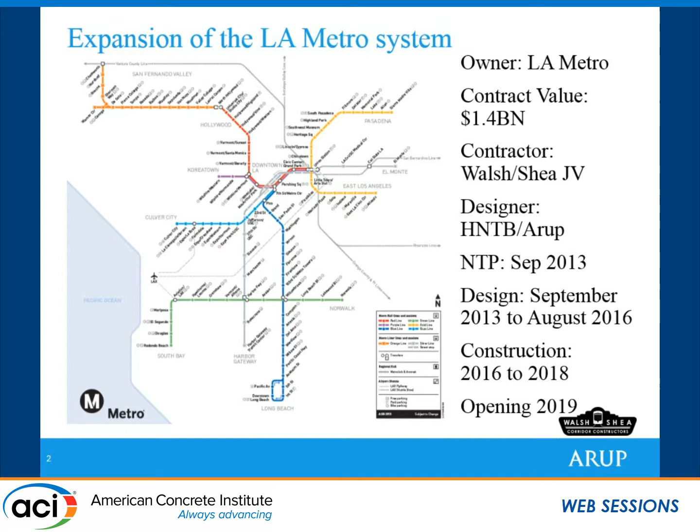The contract value is about $1.4 billion, and the contractor is a joint venture of Walsh-Shea. We are the designer with HNTB. The NTP was in September of 2013. We went pretty much straight into design, and construction is ongoing, looking to open in 2019.

Flipping it on its side a little bit for more of an explanation of the project. The first part over here on the right-hand side is fully underground. It consists of 3 stations and about 1.6 miles of tunnels. And then it goes into a series of cut and cover structures, elevated and at-grade structures, and then back into a cut and cover section near the LAX airport before it comes up on the Green Line back over here and connects up to make a nice loop system.

Everybody will finally be able to get almost to the airport using the metro, until the people mover that's scheduled to go into construction will link it all together.

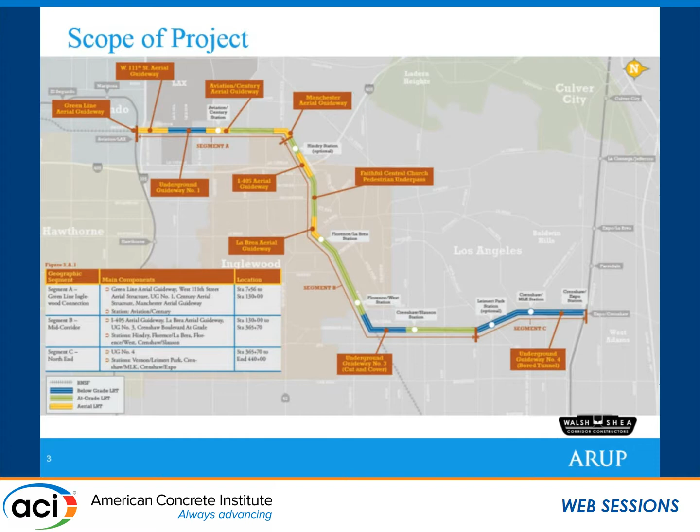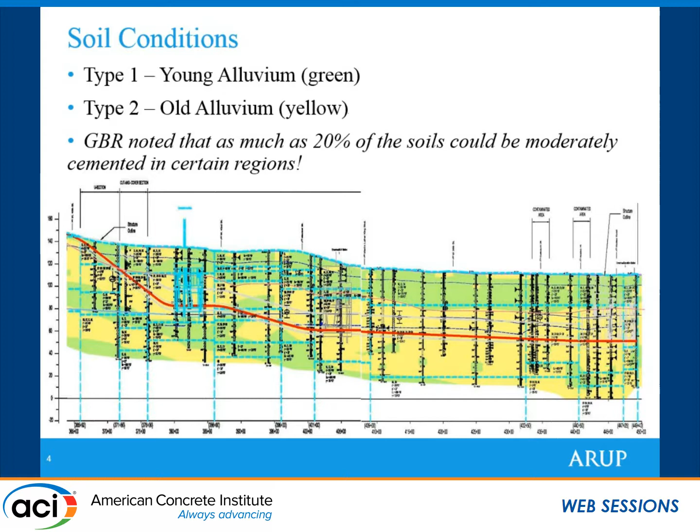Soil conditions on the site are mainly alluvial soils of varying age, between young alluvial materials and older, partially cemented alluvial materials. One of the reasons I mention that is because in the geotechnical baseline report, there were varying levels of cementation of the soils present. In some locations, up to 20% of the soils were cemented. In hindsight, that probably should have tipped us off to something that was going on here to pay closer attention to.

When doing cementitious or non-cementitious grouting, you should always pay attention first and foremost to what the sieve analysis showed. Usually what you're looking for is to figure out at what percentage the fines fall below the 10% level, because that's going to tell you what techniques you need to use in order to treat the ground so you can actually do civil work construction.

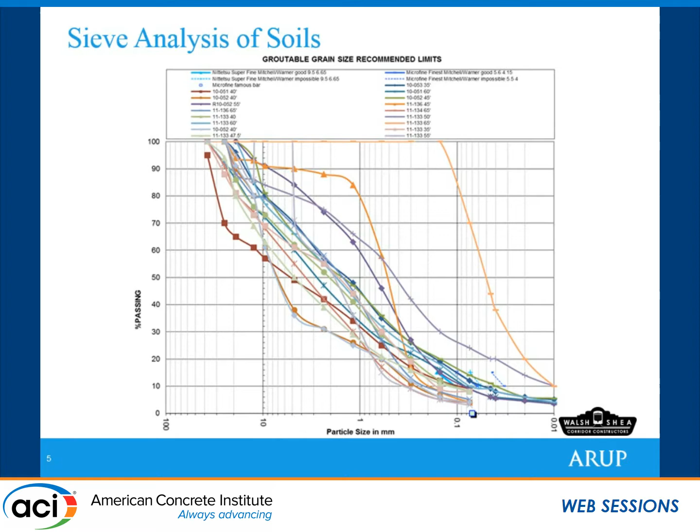In general, there are 3 major types of cementitious grouting, and then chemical grout. If your fines are just under a millimeter, you're looking at using a normal grout to treat the ground. Below that, you have fine cement grouts, which could be your microfines or your ultrafines. And then beyond that, you're looking at sodium silicate mixtures under a pressure grouting situation.

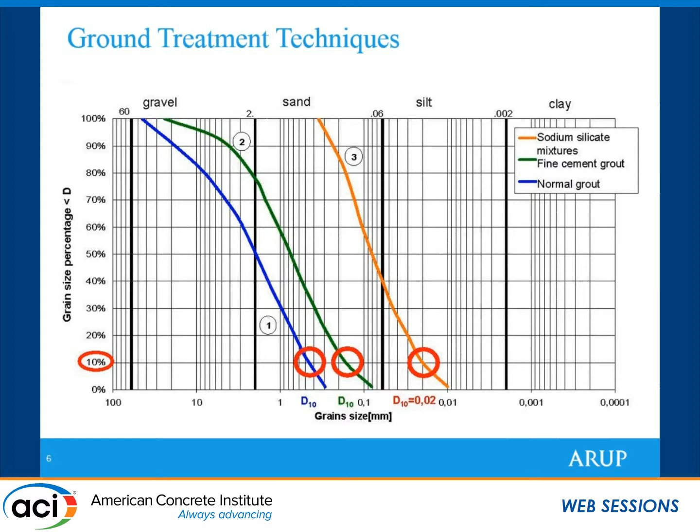The first and the largest station in the works is the Expo station. It's a total length of about 1,000 feet and is the terminal station for Crenshaw. One of the things that was noticed is that there were 2 different aquifers, and in order to build the station to begin with, one of the worries was that you were going to get basal heave due to this water pressure as you start to excavate down.

And the selected construction method here was to use bottom-up slurry walls, and then grouting the open windows between those panels due to the number of large sewers and other utilities that were in the way, and we couldn't obviously create a continuous panel wall all the way around it. So what we did was we were looking at using jet grout between those open windows to close those up and be able to excavate down.

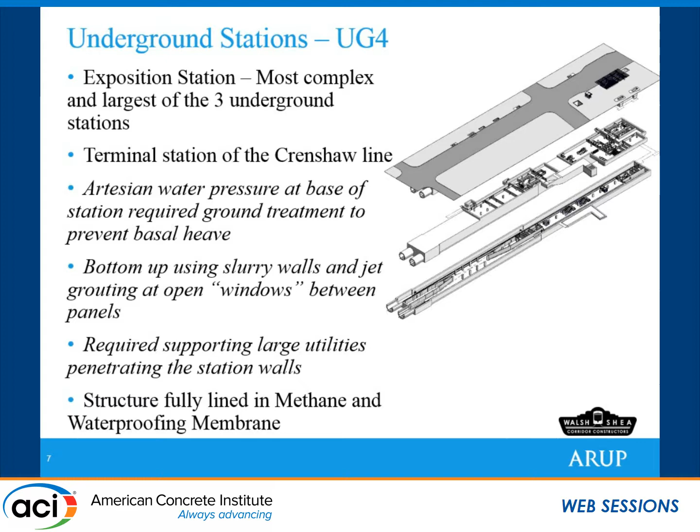It initially required that we do jet grouting across a large majority of the base of this thing, and had about 30,000 cubic yards of jet grouting. And when you're looking at about $500 a cubic yard in place in jet grouting, that's a lot of money.

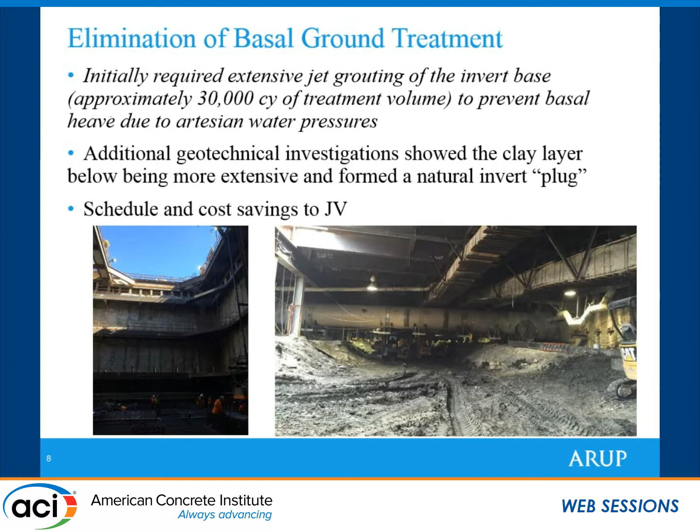So instead of going ahead and looking at that, what we did was we decided to actually invest in making the slurry walls deeper, going ahead and embedding them into a clay layer that was deeper, and then using relief wells to essentially eliminate the ground treatment. So in certain cases, just getting a little bit smarter about how you're going to schedule out your construction ended up saving us quite a lot of schedule and money.

The principle of jet grouting, for those that aren't familiar, is that you're using a large lance and a mixture of fluids to go ahead and treat your ground. Most commonly, we use a 3-portion mix of air to kind of pre-cut the ground, associated with water, and then you're injecting your cement slurry mixture. And you're usually going ahead and putting in primary columns, and then you're coming back and doing secondary or tertiary columns to go ahead and close everything up and make them all watertight, or at least as watertight as you can get it as you

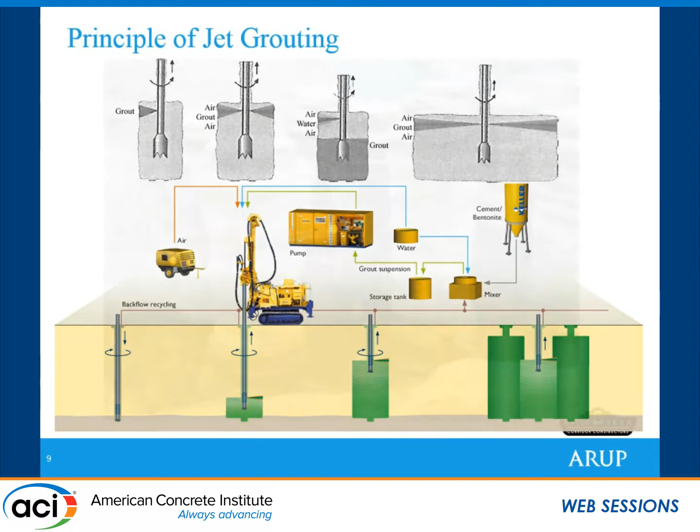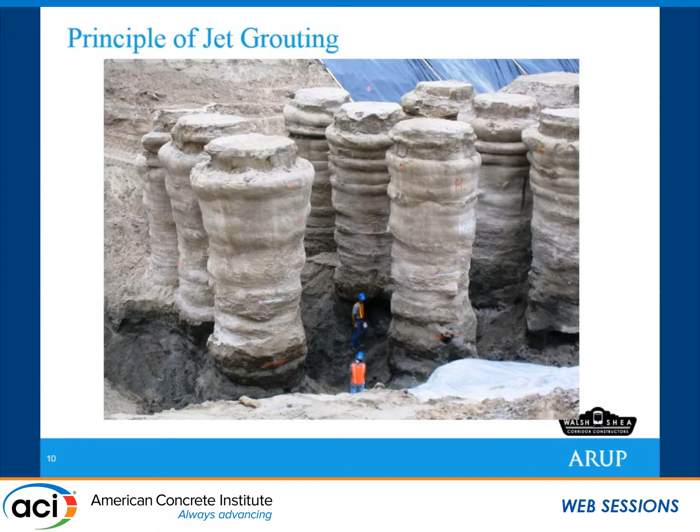go down. This is some of the results of what you can get in favorable conditions with jet grouting. Very large, essentially like stone columns in place. And some of the things that happened early on in the project as we got our test results back, when you're doing jet grouting, you're taking wet samples, which is basically you're injecting material into the ground. And so spoils are rising up to the surface, and you're basically sampling them, and you're going ahead and using your standard concrete sampling on that.

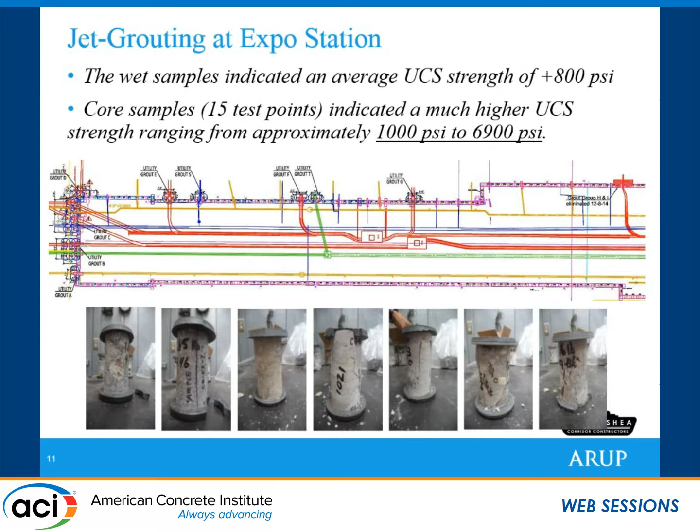We started getting back strengths that were pretty high from our wet samples, and then you do coring as well, in situ coring, and we got some that were as high as 6,900 psi. Now, that's really high for jet grout, and while this was great for some of our stuff, it also can be difficult in other things, especially when you have to excavate through it.

So one of the things that we have to do is launch a tunnel boring machine out, and usually we do ground treatment in front of the station walls, so that as we break out into the ground, we don't have inrushes of soil and material. Well, you can imagine that mining through 6,900 psi ground is going to create a lot of wear right out the gate on your tool that you're using to excavate out this long subway system. So we had to have a different solution adopted based on what our site conditions were giving us.

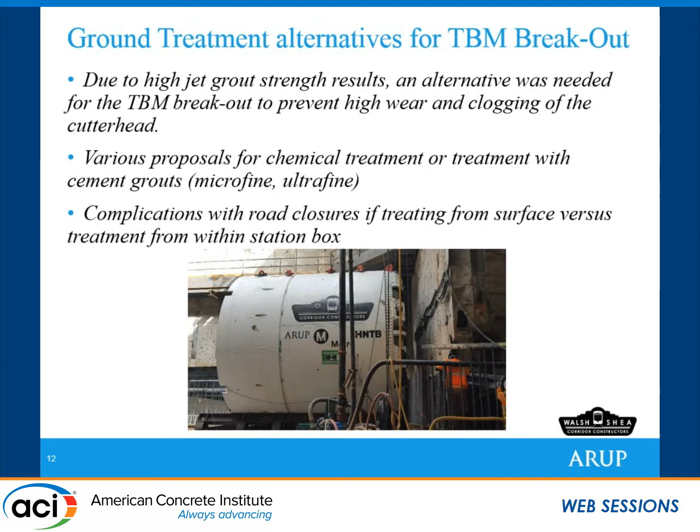And we looked at it, and our preferred treatment was going to move away from using a cementitious grout and instead use a chemical grout, where chemical grouts usually don't give nearly the strength, but would give you enough strength to actually do what you're looking at getting accomplished. So we looked at microfines, ultrafines, and then we eventually went with a straight sodium silicate solution. One of the complications was that we had a roadway in front of our station box, and at Rodeo Road and Crenshaw, it's a fairly busy road, and shutting down that street to do ground surface treatment was not the preferred option. So we looked at a couple different things there.

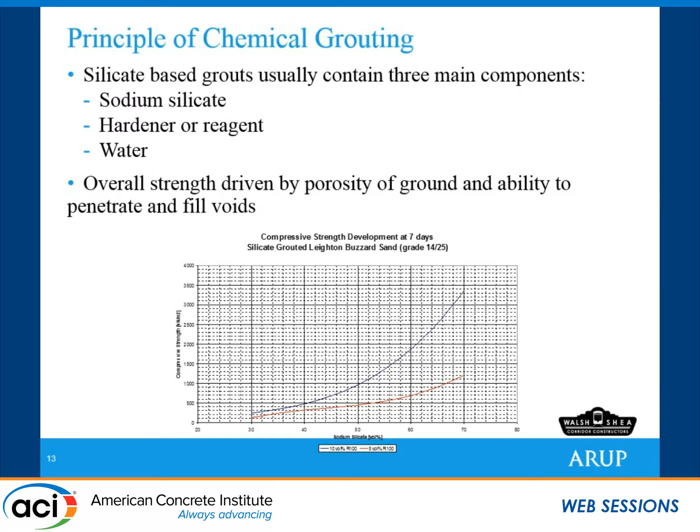Just a principle of chemical grouting. Our silicate-based grouts are sodium silicate with a reagent and then water. So really it flows like water and has that same viscosity. And again, the strength that you get is directly related to how much you can put into the ground and how porous the ground is. So if you have a lot of fines and you can't pump it in, you're not going to get nearly as much strength as if you were, say, grouting a clean sand.

So unlike jet grouting, where you're basically pushing a lance into the ground and then slowly withdrawing it as you're injecting, in chemical grouting, you actually pre-drill, install what we call a sleeved port pipe, and then you come back in with a double packer and you inject into the ground so that you can actually do it in stages in particular locations.

So in this case, this was Central Subway, where we did a series of groutings underneath buildings and underneath BART. This is a little cartoon of the lenses that get formed, but it's very much this way in the ground as you're injecting it. And the idea, again, is to use a primary, secondary, tertiary approach in order to get the coverage that you need. And then also the sleeved ports allow you to come back and do re-injections if you need to get the coverage you want.

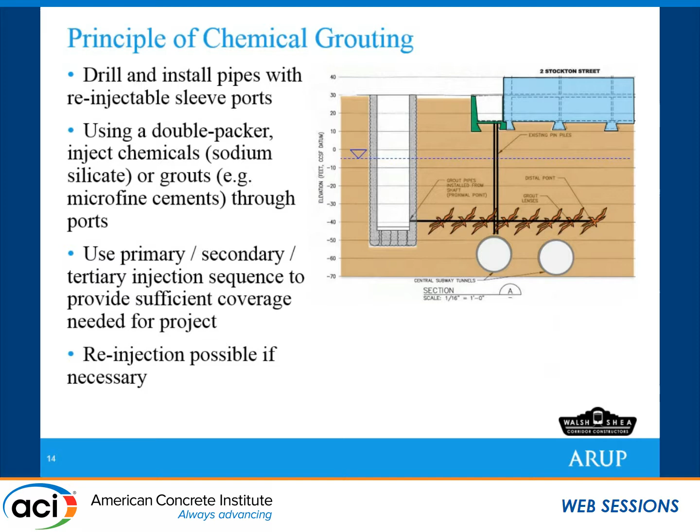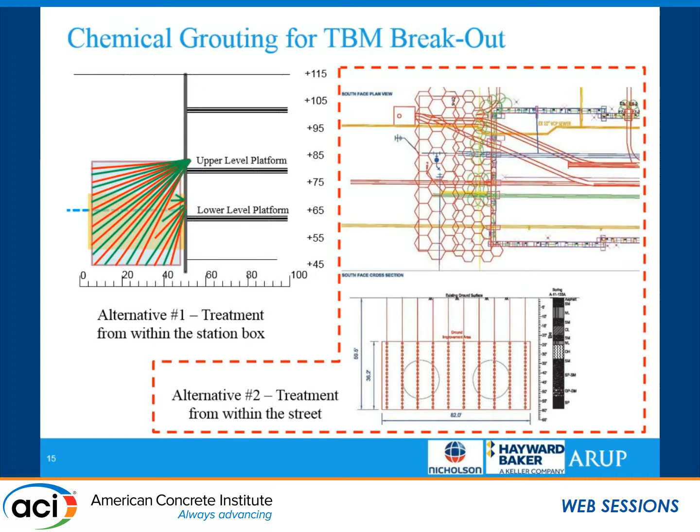The machine itself and some of the other concrete works that we were involved with, we designed out the precast concrete segmental tunnel lining, which is a traditionally reinforced segmental lining. We also designed out the cross-passage temporary and permanent works, track bed and the walkway inside. The tunnel station seismic joints were quite interesting because of the different behaviors between the station and the tunnel in a seismic event. And then we had to do all that ground treatment at the tunnel station interfaces and the cross passages.

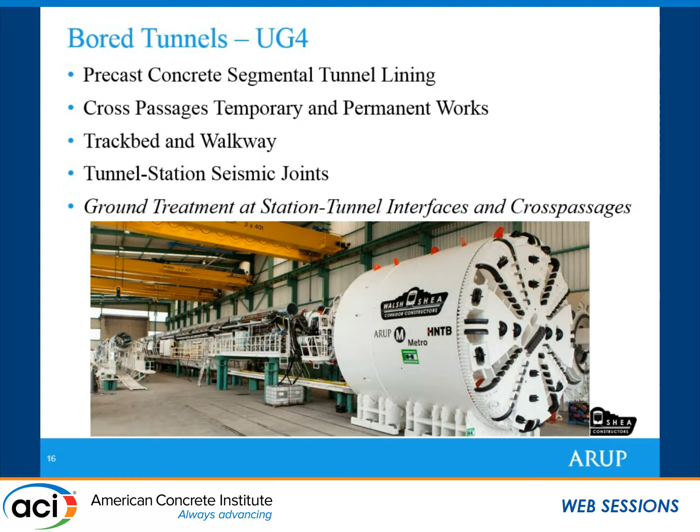So cross passages are oftentimes used for evacuation in between tunnels, but oftentimes become equipment rooms for the operations and maintenance people. We combine the two uses into one, but because these are short sections, these are usually hand mined. So you have to do ground treatment in order to make sure that the ground doesn't come in on you and move. This is an active roadway above where we were working, so any cave-ins here would obviously directly start affecting the roadway.

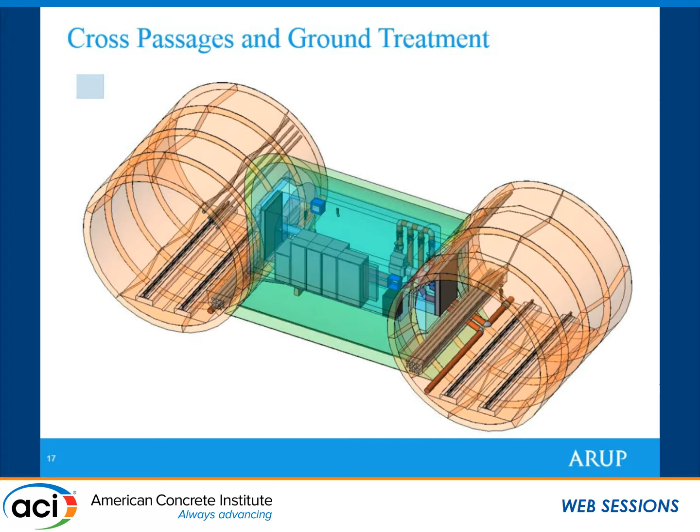What happened in the course of the project was we mobilized our contractor to do jet grouting at Expo Station. And as we were getting the test results back at Expo Station, we were getting those extremely high break strengths. And we started getting worried, well, we're going to have to mine through 6,000 PSI concrete. And we looked at trying to switch and go to chemical grouting. But unfortunately, at the locations where we had the cross passages, we had too many fines. And so the possibility that we would mine into an untreated section of ground outweighed the benefits of trying to do something different.

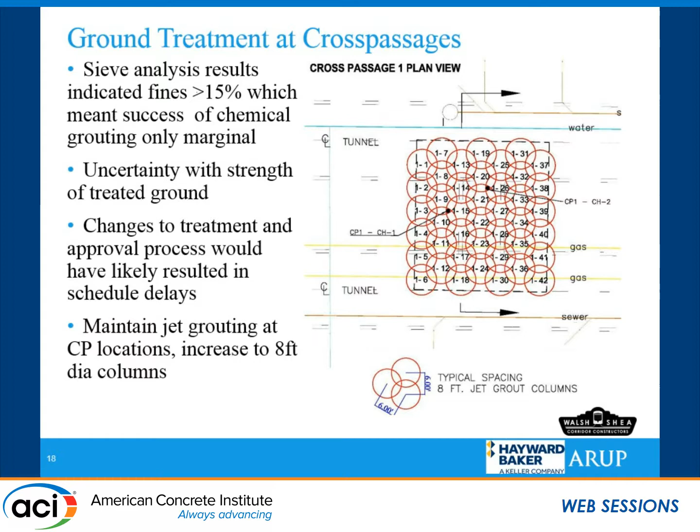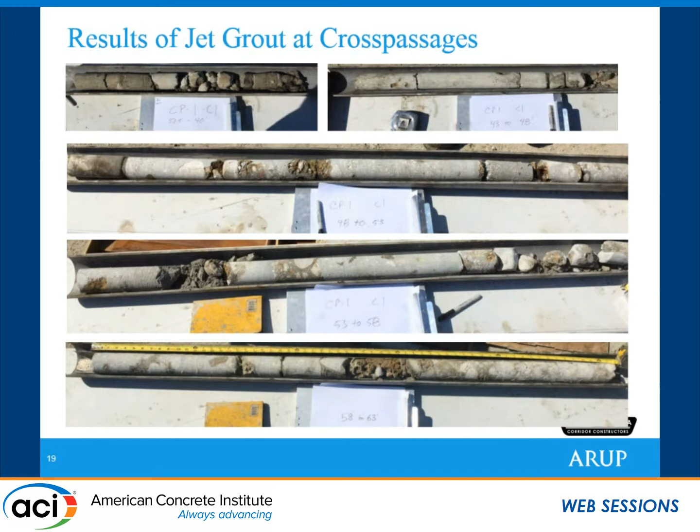So we ended up having to essentially, for schedule reasons as well as for risk reasons, stick with the jet grouting, which we tried to improve by going to 8-foot columns and using a wider spacing in order to maybe get away from those high break strengths that we were getting. Unfortunately, the test cores came back like baseball bats. I mean, they were just like fully big pieces of concrete. And we had very strong cement-like results, even higher break strengths. One of the things that you can do as well is you can always do a back analysis of your statistical results to get your design strength.

It came back as higher than 2,000 PSI for design. So we were essentially going to be mining through a big block of concrete. And that ended up being used as a benefit at the same time by eliminating a lot of the internal support that we would have had to have in the mainline tunnels and a lot of the cross-passage internal support.

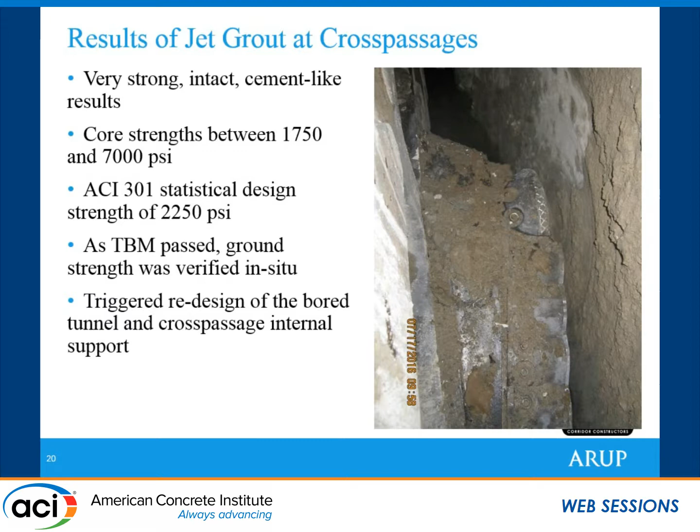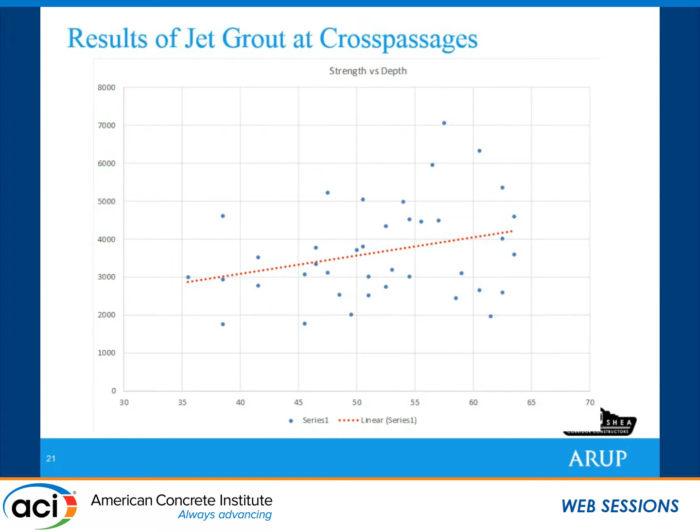So this is some of the results of strength versus depth here. Break strengths on the vertical axis versus depth on the horizontal axis. You can see some of these as high as 7,000 and on the low end right around 1,700. So pretty tough stuff. And just to show you a little bit.

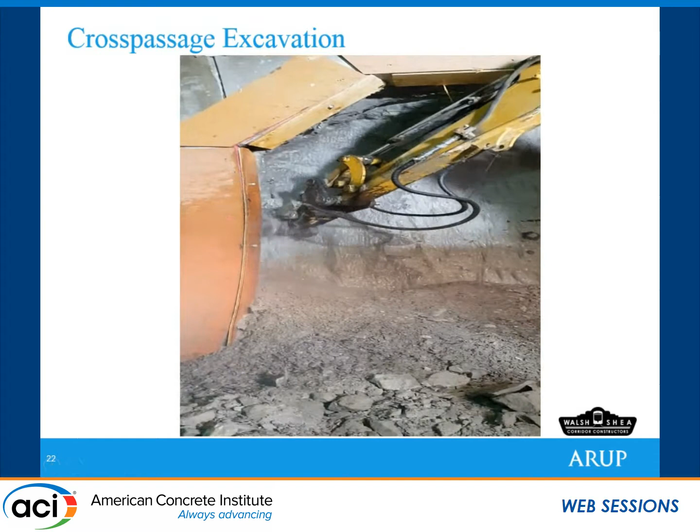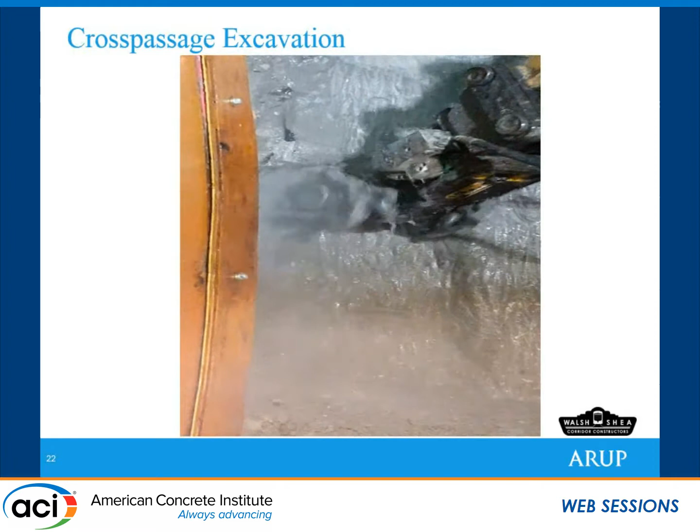So this is a road header trying to excavate through our treated soil. And as you can see, the stuff is just very, very tough, difficult to mine through. Took a long time, and this is one of the lessons learned about this whole job. Overall, we ended up making it work, but in hindsight, when you're working in the LA area, unless you want something like this to happen on your job, just keep this in mind.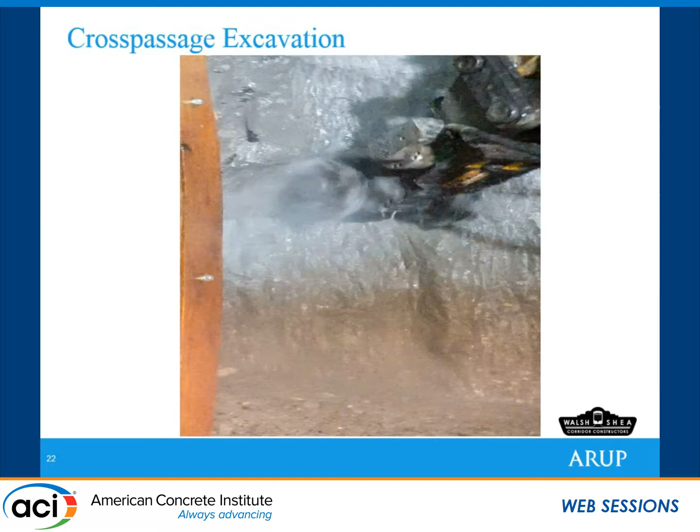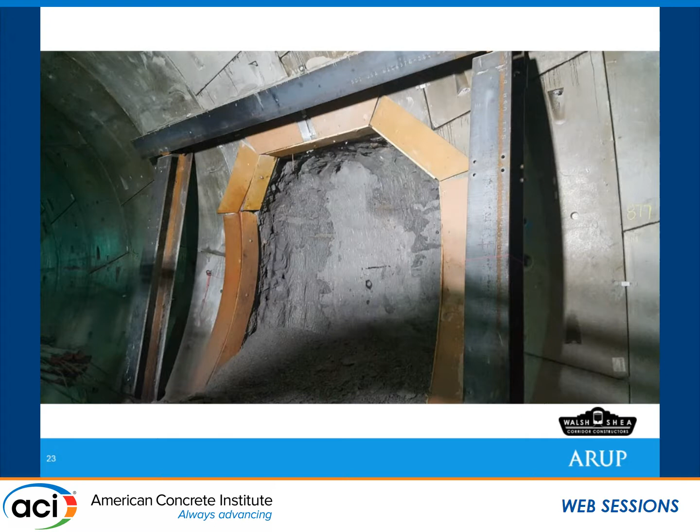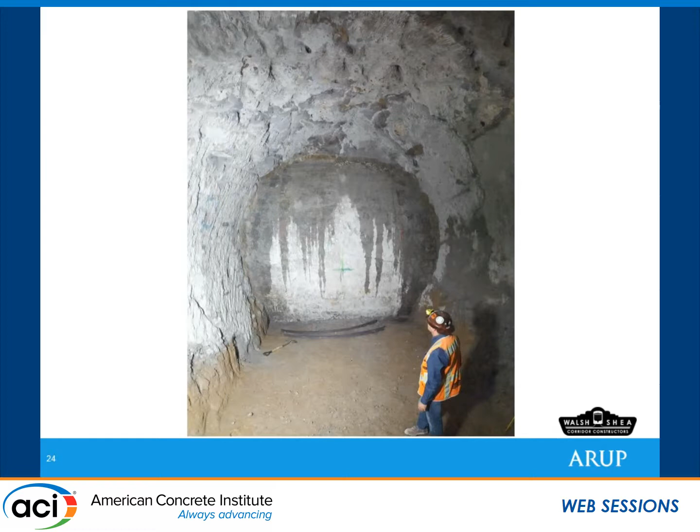Some pictures of the cross-passages as they were being mined out. It made it very stable. There was no groundwater at all. From a standpoint of sleeping at night, you knew it wasn't going to come down on your head. And in the end, we ended up eliminating all the shotcrete on the inside. We only had a picture frame around the outside of the tunnels. And we just put up a little bit of shotcrete to make a nice smoothing layer to put our waterproofing membrane up against.

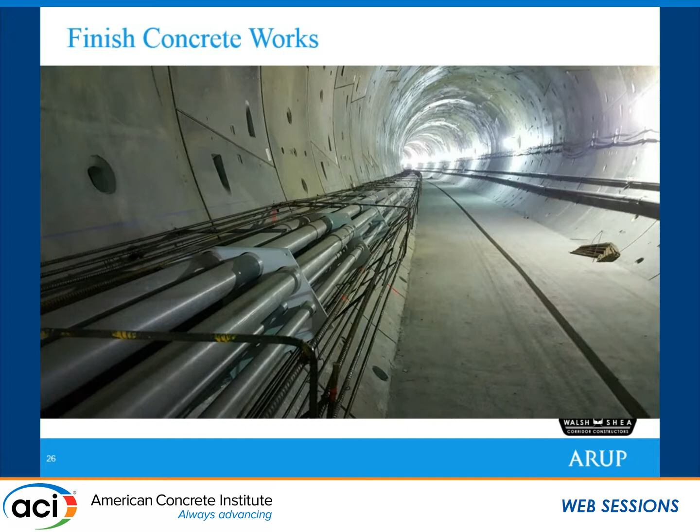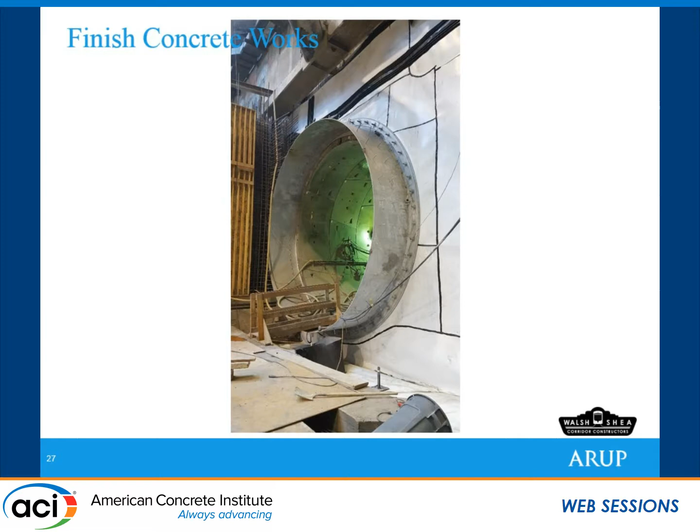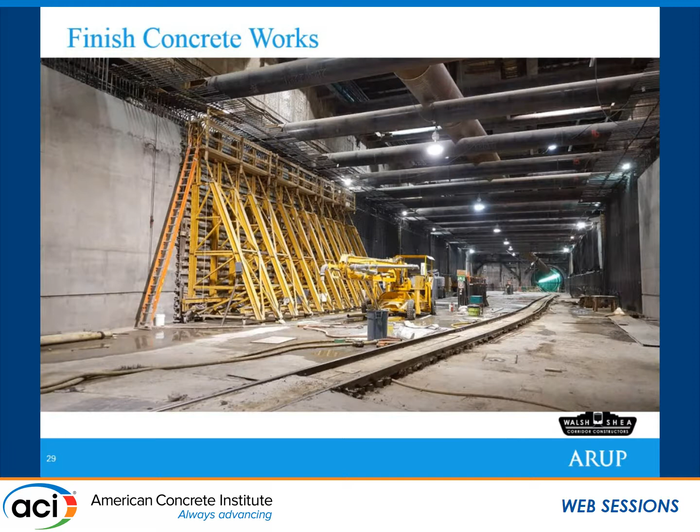And yeah, I just want to show you some pictures of the concrete works since this is a concrete seminar. This is the walkway inside the finished tunnel with the invert already cast. This is the tunnel station seismic joint, with all this white being HDPE. We need to use something stronger than PVC for metro projects because of the methane in the ground in Los Angeles. And this is some of the station concrete works starting from the invert and casting up the walls. Some of the moving formwork, and then some of the cross-passages. The cross-passages are being cast as we speak, and we'll be done with pretty much all the concrete work before the end of the year, and then start all the rest of the fit out.

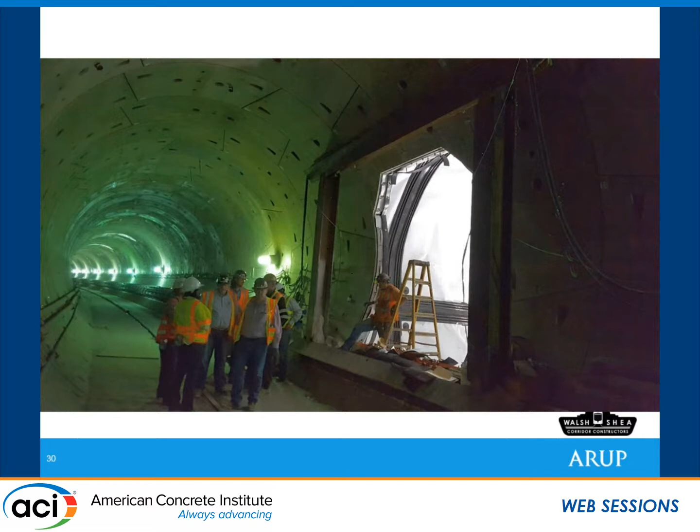So it's always good to take a big step back on these projects and think about what you did right and what you did wrong. One of the things is that Metro does like to release a lot of their contracts as design build, to allow the contractor to adapt their means and methods to what they want out of their specifications. And that's great, but we also need to be able to adjust them in the field and have that flexibility as we go through, to make sure that if we encounter something in the field that's different than what we expect, we have the right systems in place to make those changes occur in a timely fashion so that we don't have engineering decisions being made based solely on schedule.

So that's one lesson learned. The other one is, as engineers, we do need to challenge ourselves and critically evaluate what we're putting out. There were several times we went back and forth between the possibility of simply mining out the cross-passages without any ground treatment. And that carried a level of risk, but was that level of risk commensurate with schedule delay and the complexity associated with what we knew the results of the jet grouting was going to be in the cross-passages? And as owners, we also need to understand that while we set our contract documents to be as good as we can, they're not perfect and may not always have the best intentions for the project as we get into the works.